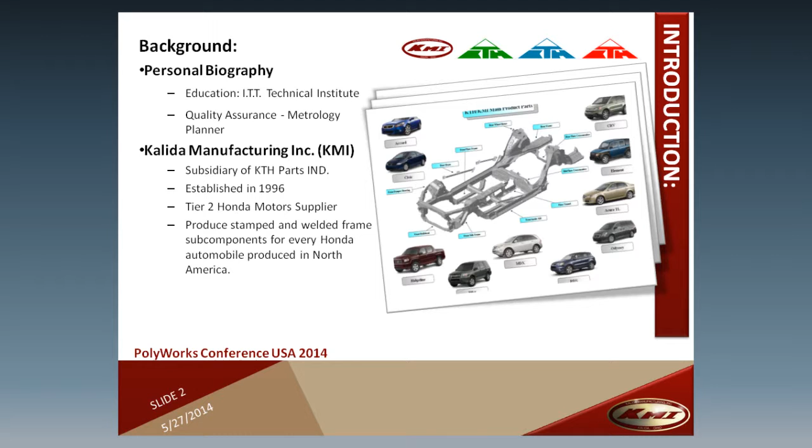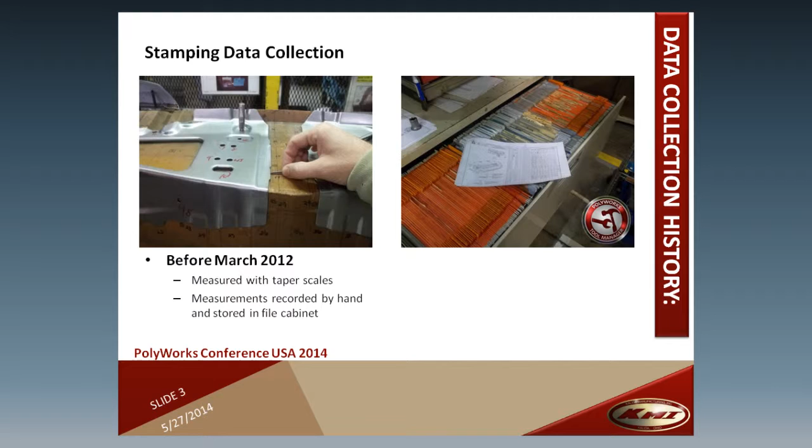So I'm going to explain first where we came from with our data collection process. 3 years ago, when I first was initiated into KMI, our process was to take data collection using tape scales, recording our data by hand and filing it in a file cabinet. Since then, we've been able to develop a system utilizing macros, portable CMMs, touch probes, and laser scanning to quicken this process and produce different tools that were capable of progressing what we do.

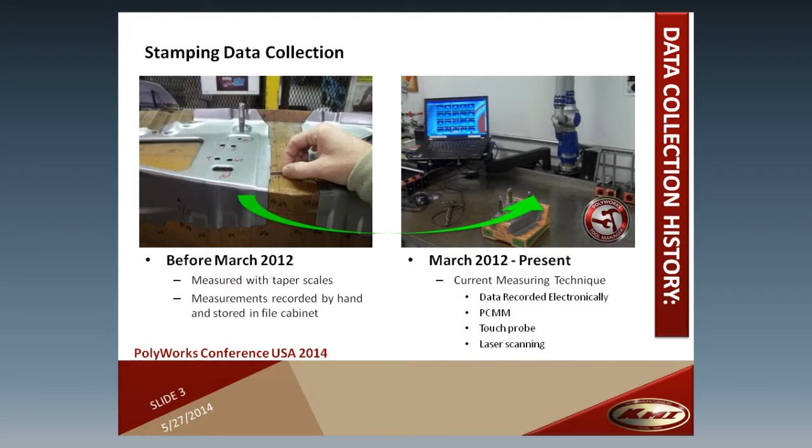So our team's goal was to develop a system of processes that are simple to use, increase data collection productivity, show time savings, and are compatible with both Faro and Romer arms. We try not to be biased, though those two will probably go hand in hand and have a war over that. Our system of application tools was to make sure that we had data evaluation tools, fixture layout tools, jig layout tools, program development tools, and data collection tools.

We needed to ensure that we had efficiency and quality. We used time and cost savings analysis and return on investment analysis to judge whether a macro was beneficial or not. I'm simply going to go through 3 macro sets from this point on. The first 2 are part of a larger project known as our KMI PolyWorks Tool Manager.

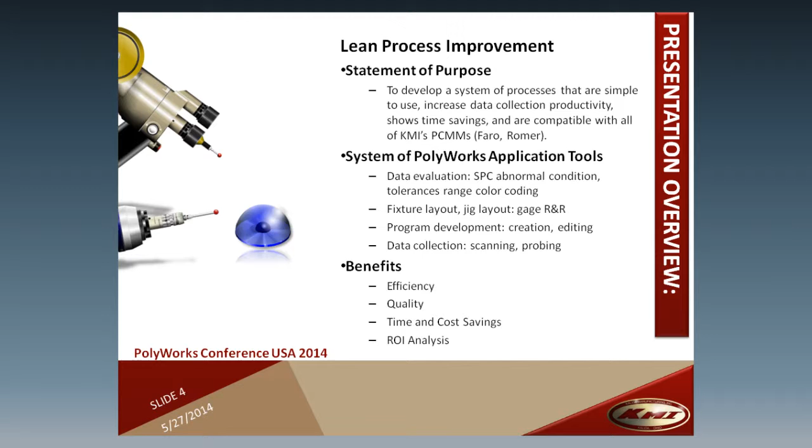So imagine if you're doing touch probe data collection. You always have a CAD in which you might have a surface point that is blocked by the CAD and you're not able to see it. PolyWorks has a tool that is called a guided image, but the problem with creating these images is it takes a while for the creation time. Sometimes locating this 3D scene is very cumbersome, and it's hard to separate and hide features and comparison points.

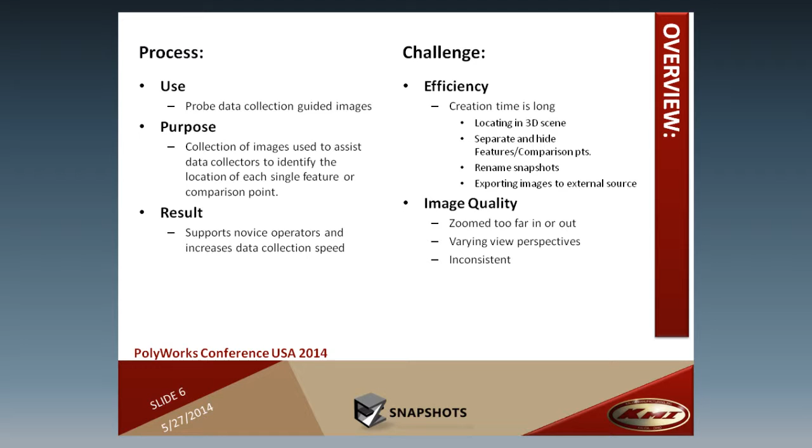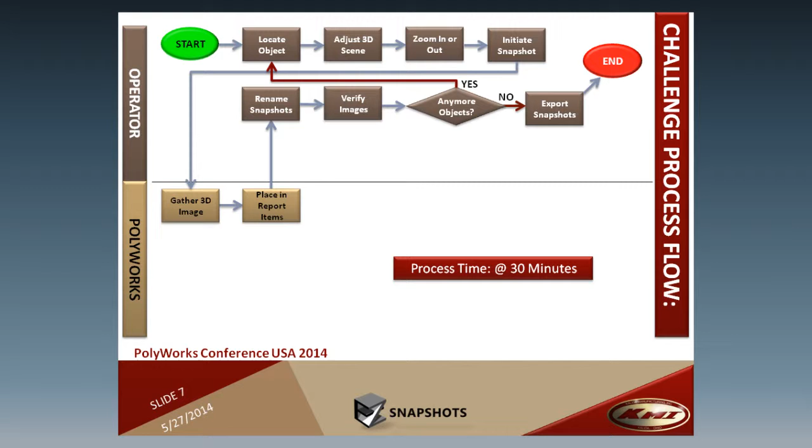We also have image quality. Zooms are too far in and out where the guided image is hard to see. The view perspective, it's hard to tell where the next point or the next feature is, and it's inconsistent. So here's the current process flow for what we have to do with PolyWorks. You see that it's really heavy on the user interface. The only thing PolyWorks simply does is generate the snapshot and place it in a report item. This process can take us about 30 minutes to do.

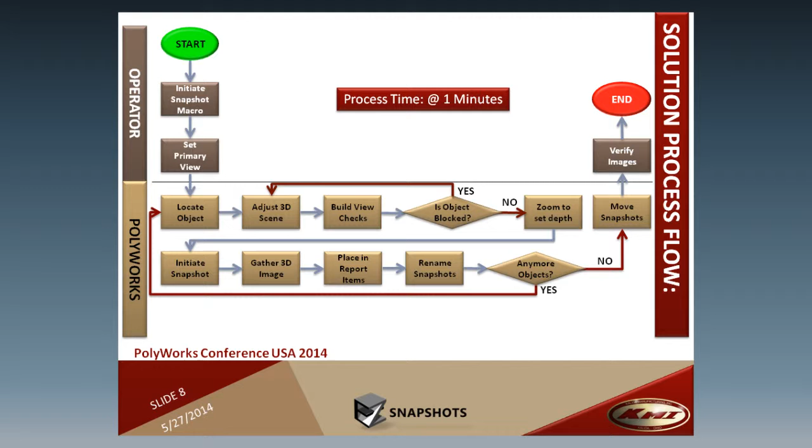What we proposed to do was to just simply have an operator initiate a macro, set a primary view, and a macro runs, and the operator just simply has to verify the image. We found that this process takes about 1 minute. We're going to go through a demonstration here, just simply how this goes, and go from there.

So when we initiate the macro, we have to establish a primary view. We set an access point in which we generate a 3D scene which is user-friendly, in which we pick a primary view. The operator uses a color coding in which they're able to rotate through the project, selects a primary view, and from there the macro begins.

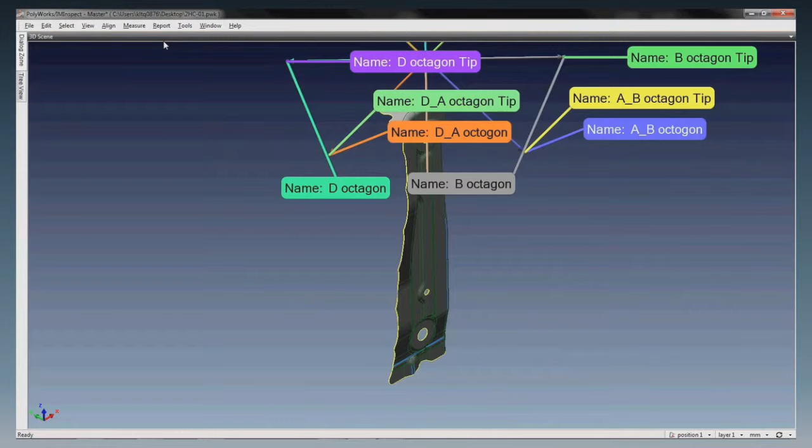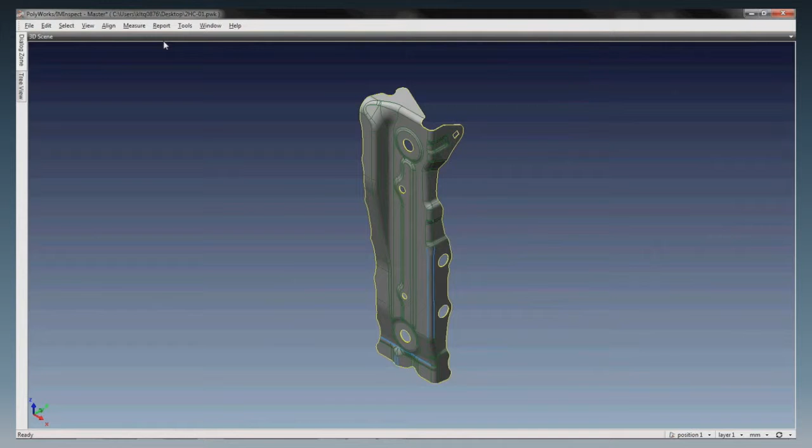We do what we call a vector bloom, in which vectors are centered out of a center point. If the vectors cross the CAD, it creates a point and rotates the CAD so that an image can be created. If we continue seeing this, it's kind of hard to verify that a point is created correctly or incorrectly. There's just too much going on in the current scene right now.

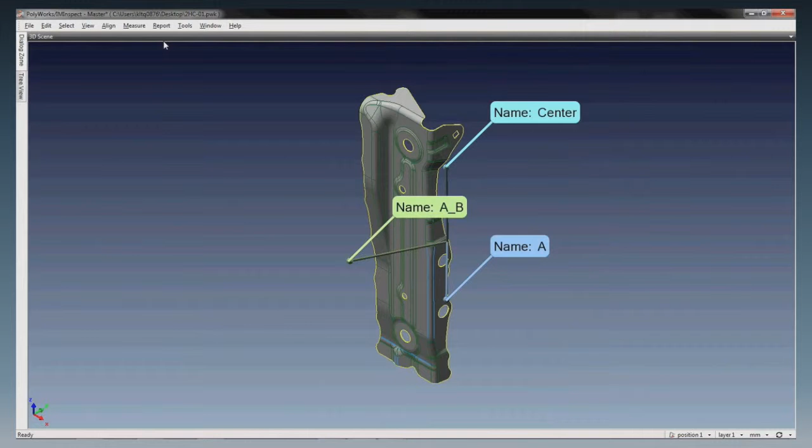It just simply continues through each one of the point features on the tree view, and it takes that picture of that point and stores it into the reports. We then take that report and file it into an outside data folder or source. So we'll continue with this. It's still hard to verify this point because of that.

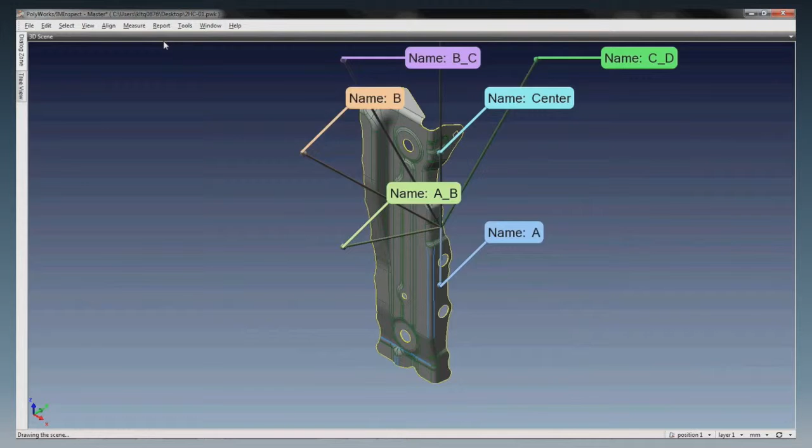Let it run here just a little bit. So it's kind of hard to verify, so we had to create a system in which we kind of hide the blooms, but we're still able to verify whether the image that we are creating is good or bad. It should be flipping over here sooner. And by hiding the blooms, we are able to actually speed up the macro.

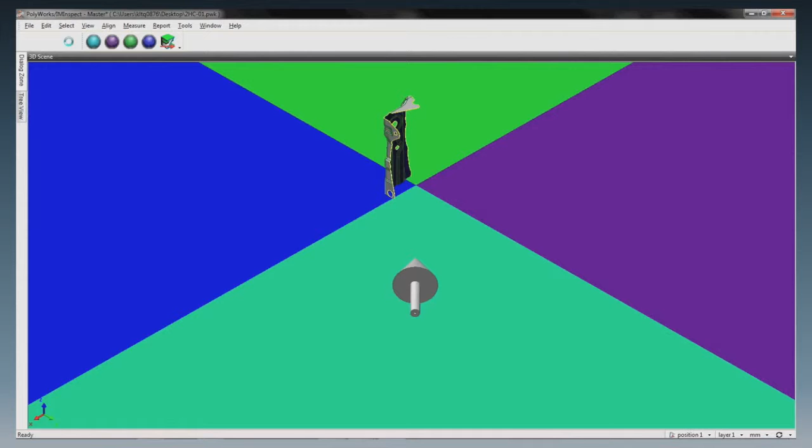So again, how do we make this faster? We're just simply going to hide the blooms, hide the creation of the 3D scene, the 3D modeler, so that we're able to view it easier. We don't see the actual generation of that. We don't see how it's changing. And this is actually going to speed up the process slightly.

So what's the benefits of this? We create efficiency. We save about 29 minutes for each program that we use this process for. We found that the break-even point for our time management was at 166 programs. We're currently at 702 programs that we have used this process for. We're capable of multitasking through this process. The images are consistent in their perspective. The location is stored on a folder or same location, and we're seeing continual benefits of 207 hours saved per year for this process.

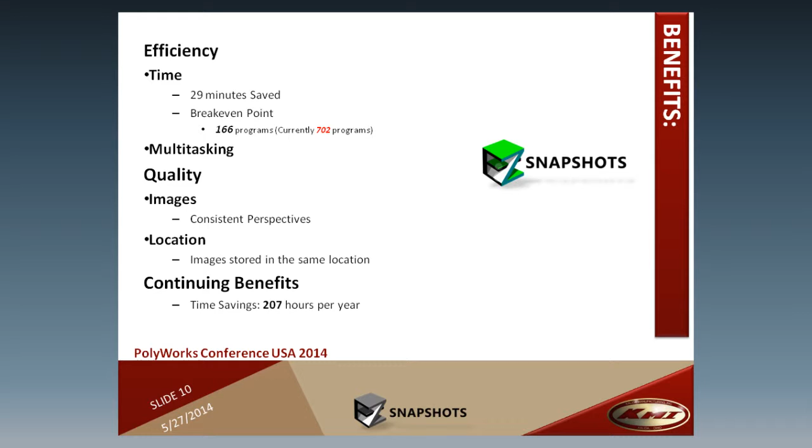So the next macro that we're going to go through is, what if I rework this and give it to another associate to build a macro with? This is actually one of my pride and joys. This is called the easy reporting macro for scan process. I actually reworked my picture macro and gave it to my fellow coworker, Brian Meyerholtz, to create a way to report scan data. Brian initiated this project back in November of 2013. His development time is 40 hours, and the size of the macro is 7 macros at about 3,000 lines.

The purpose of this is to create a scan report. We do about 5 scans each day. I'll give you a scenario in this instance. Say you have a die quality issue or something along those lines where there's a meeting within the next 30 minutes. It's essential to get that part scanned, get that information to a manager or someone in that meeting as quickly as possible and convey that information to them. So our goal was to actually cut down our report creation time so that we were able to convey any messages that we needed to that supplier.

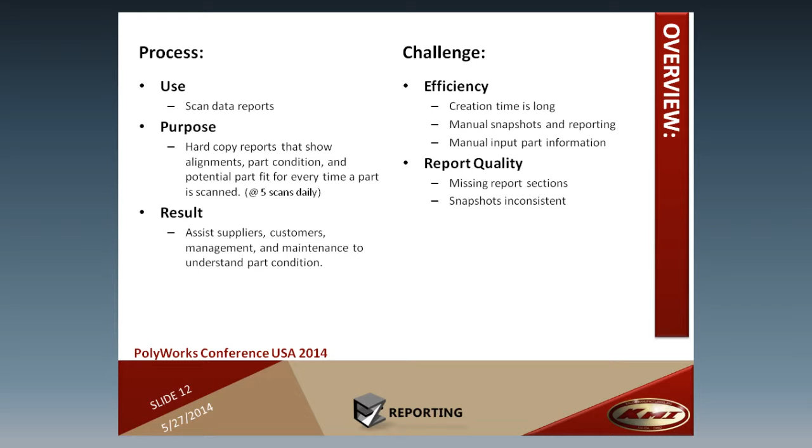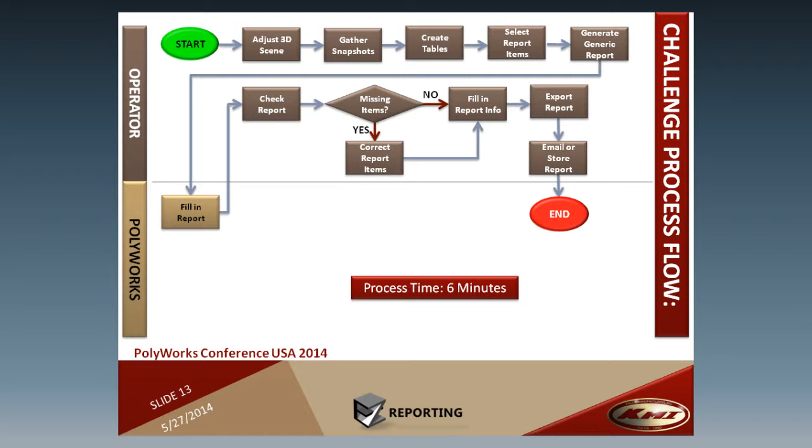The problem with auto creation or hand creation that we currently have in PolyWorks is the creation time is long. Manual snapshots and reporting add to this time, and manual input of part information. Sometimes we have missing report sections, and snapshots are inconsistent. So again, we're going to look at the workflow for this. Initially, we have a heavy user interface where about the only thing that we are capable of doing with PolyWorks was filling in the report, and we would have to make decisions from there. We are finding that this process takes about 6 minutes, and we thought we could improve it.

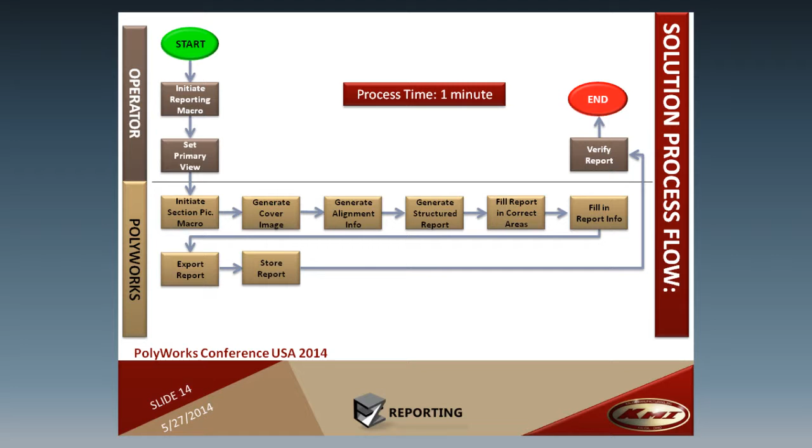With the solution Brian was able to initiate, again, we were just simply initiating a macro, setting a primary view, and verifying what the report looked like. This process we found took about 1 minute. Before we go into this demonstration, I want to give you a little background. I have 2 new associates with me. I decided to push them against one another. Gene started actually putting in the manual process for this, and we gave him a 30-second head start, and Brian started the macro script at that point to see where we go from there.

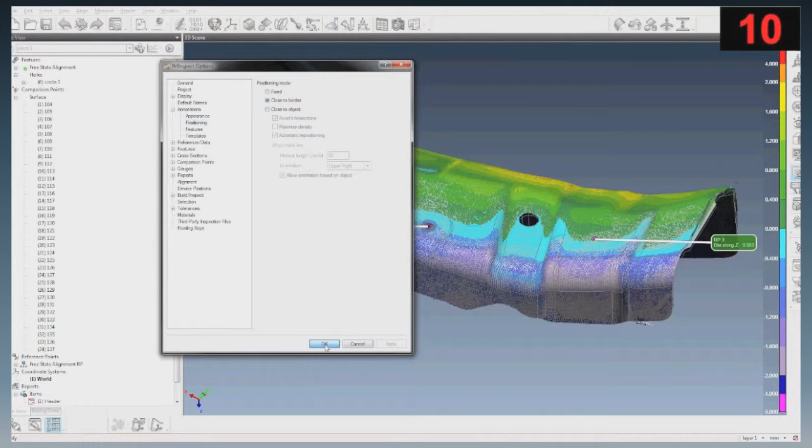So at this point, Gene's simply just going through the script and doing everything that he has to do. He just simply had a raw data sheet; snapshots, reports, and that stuff have not been generated up to that point. He's up to 10 clicks at this point in time. I told them to count up to 100 clicks while they were going through this process. Shortly here, Brian's going to start up his macro script, and within 3 clicks, he's caught up to Gene, who had a 30-second start. He's setting his primary view right now.

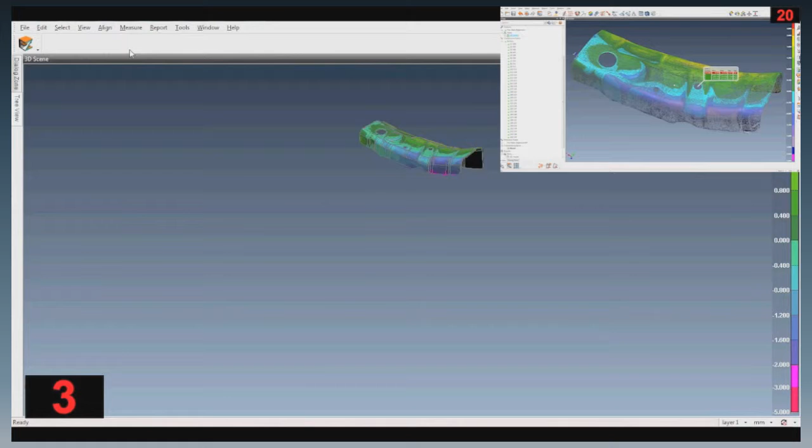And Gene's taking his first snapshot, and Brian just passed him, where Gene had 20 clicks and Brian had 3 clicks. Shortly here, it is flowing through the process. It's cutting up the program, and it's able to generate pictures from that.

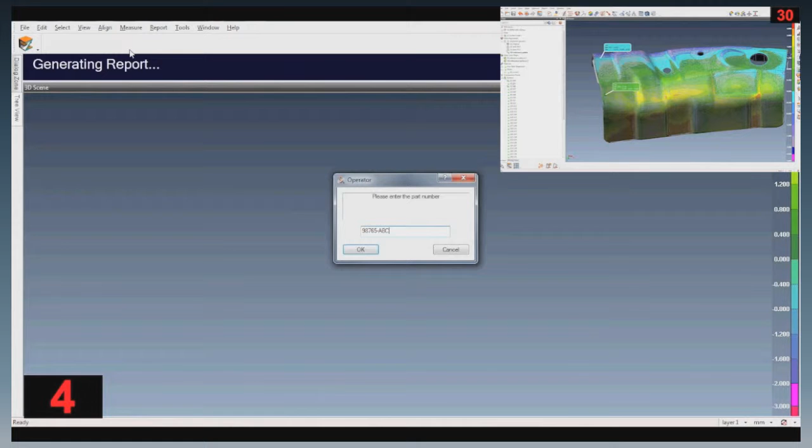It's taking that easy snapshots and cutting up the part. Right now, Brian is entering part information. This is just essentially what the part number is, whether or not he wanted to add special notes or anything along those lines. As soon as he's able to progress from here, our PolyWorks macro is going to auto-generate a report template which we can print off, hand to a manager, and go from that.

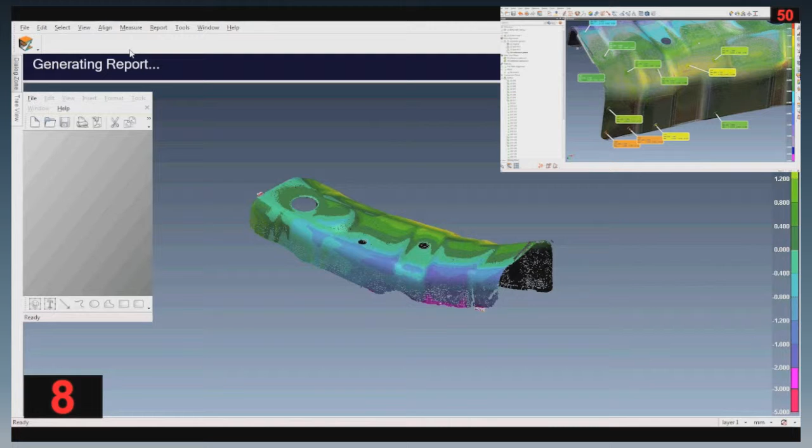We're at 8 clicks right now for Brian. It's going to generate 2 more images, and he's going to be able to verify his report. While Gene is just up to 50 clicks, and he's just taking a second snapshot on his surface points. Brian's verifying the part.

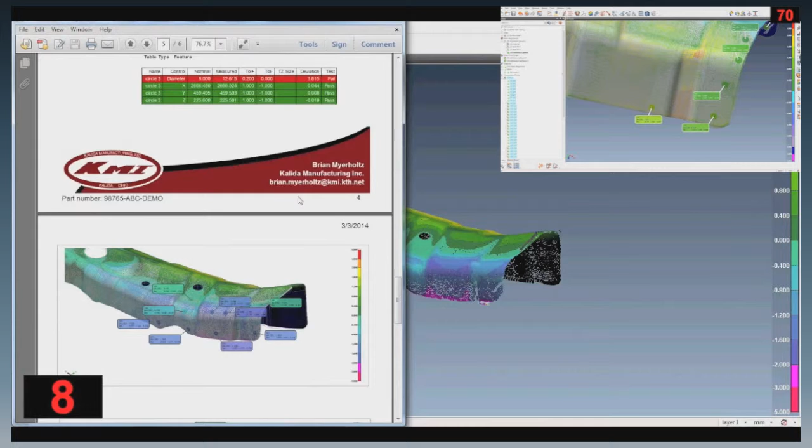We actually generated a template which is unique to KMI. We have the part information. We set the alignment showing where our alignment was. The part actually generates information that is pertinent to Brian, his email address, his name, without Brian ever entering that information into the report. Gene's still going strong here.

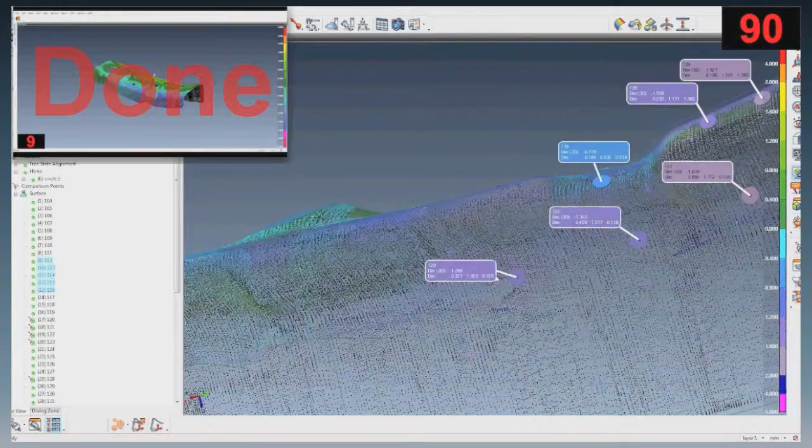He's at 90 clicks. Brian's just got finished at 9 clicks, and Gene's just halfway through his actual pictures for the snapshots for the surface points. We should be actually speeding this up shortly, but I'm actually going to stop this.

Gene's going to go through the same process. The movie will actually go on for another 2 minutes, 3 minutes, and Gene will actually make a few mistakes in that process. Where Brian's information was automatically generated, Gene would have to actually enter that information by hand and go forth from that.

The benefits to this is the efficiency. We're saving about 5 minutes per each program. So we're seeing a break-even point of about 480 new SCAN programs, or 96 working days for KMI.

This leads to multitasking. Actually, when Brian was running this test, he was signing off on papers that were pertinent to our quality process. The reports ensure that important information is existent within the process. The reports are consistent, and we have an exclusive style to our reporting.

The continuing benefits, this is the big one. Brian actually was developing this when he was only 3 months in at KMI. No prior macro script education, no experience along those lines. So this is all part of a big process that we call the Polyworks Tool Manager.

The Polyworks Tool Manager has been developed by Adam Steck-Schulte, myself, Brian Meyerholtz, and Eugene Swagger. The initiation of this project was 3 years ago, March 2011, and it is over 1,000 macros and over 100,000 lines of code. We are currently developing this process, and we're actively using it.

The part which I'm going to demonstrate in this process is our actual touch probe data collection process. So we went over how we were using taper scales prior and filling it by hand. Well, we were finding issues with varying data. How hard did the user push in on the scales? How does the operator read the scales?

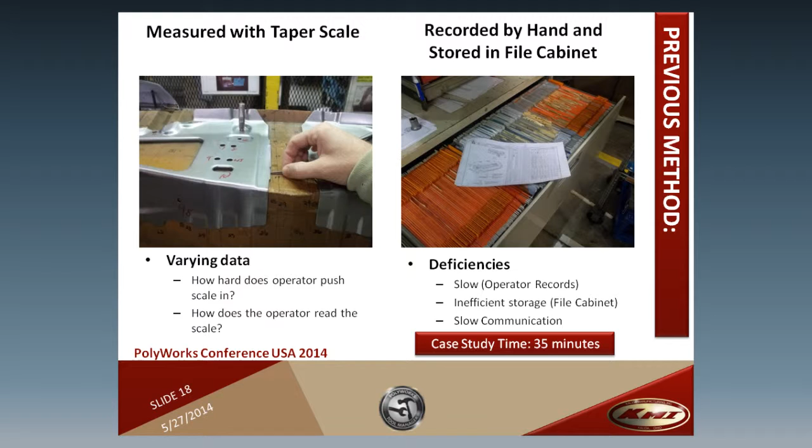Deficiency on data communication, slow operator records, inefficient storage style, and slow communication. We did a recent case study in which this took about 35 minutes to complete. What we decided to develop was the KMI Polyworks Tool Manager utilizing touch probes. We have 3 stations set up with cloned programs.

In this process, we have linked data trend charts, and you'll see through the video here, we're still using V11. The importance of that is that the data is linked within the trend charts. We created a program directory for users to be easily able to identify programs, click them and open them without going file open into different programs.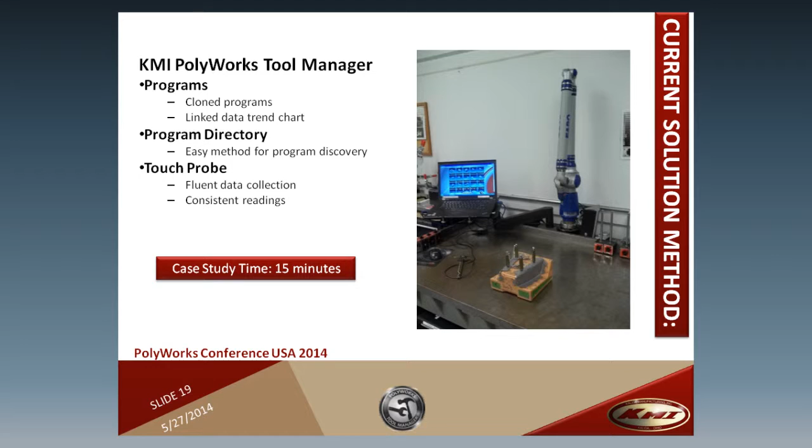We utilize a touch probe. This allows for fluent data collection and consistent data collection. In our recent case study, this took about 15 minutes. So I'm going to give a demonstration here on our current data collection process. Gene is actually our operator.

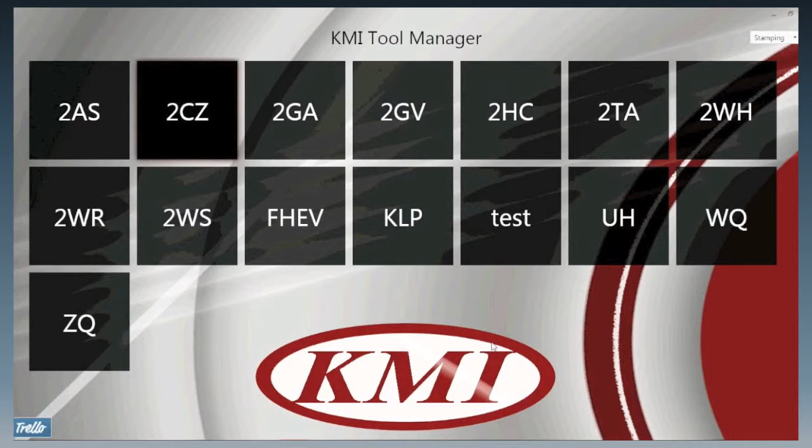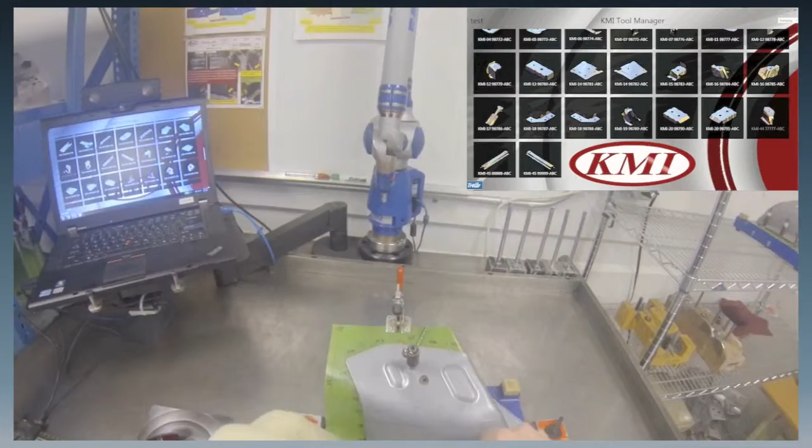He's going into our data hub or data directory, picking a model code, flowing through and picking a part number to open up here. He opens up a part number. He's able to get the part ready. He's able to multitask while the program's open. Again, we're utilizing V11 just because of the trend chart data collection and the ability to link the data between the two stations utilizing the stamping probing data collection right now.

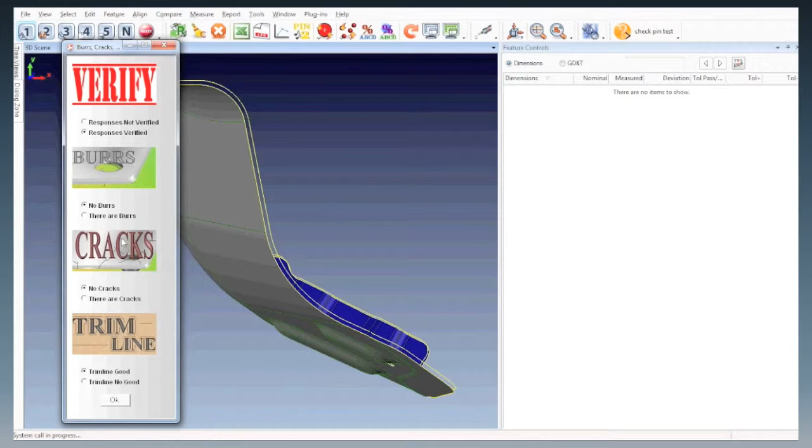As the program opens up, Gene gets a prompt telling what the part name is, the part number, and what die it comes from. Gene initiates step one. Please make sure to verify your responses. And he makes a mistake, and the program corrects it, and he's able to go through and go from that. He's entering his clock number, the press which the part came from, the thickness of the part utilizing calipers that are connected to the computer.

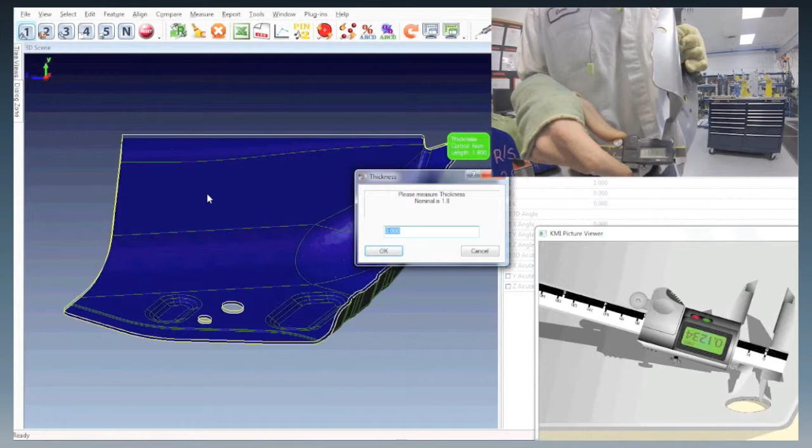He's going to get a reading here telling him if it's good or bad. He's going through with that calipers and actually measuring the holes, and he's able to hit the electronic connection, and it's able to record that information directly into Polyworks.

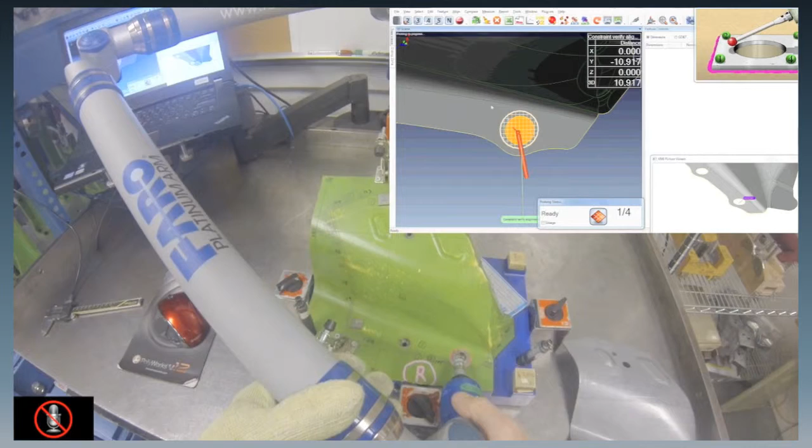The voice prompting system actually initiates him, telling him that he's on to step 2 of the process. Right now he's measuring an alignment verifier. This verification is stating that when he aligns the part, it is a good alignment. We were experiencing that sometimes when we would set up an alignment, that alignment was bad. That alignment verifier simply tells us that we have a correct alignment and we're able to progress from there. He's just going through a prompting system.

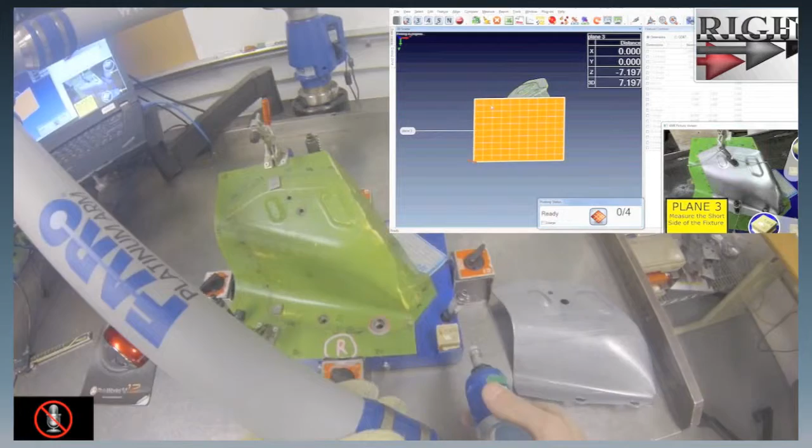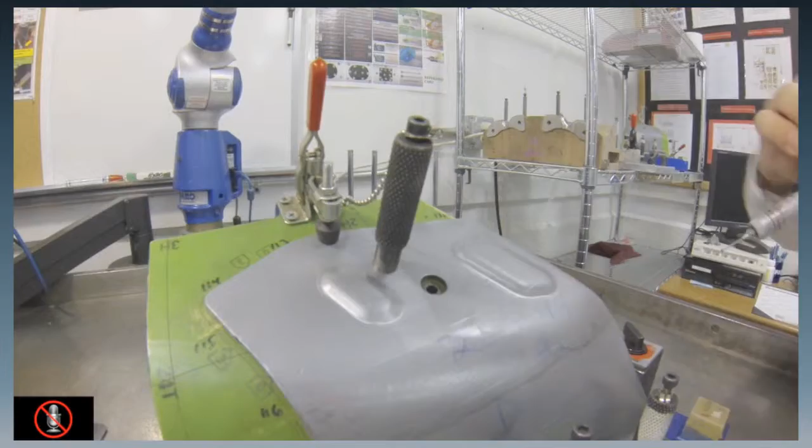On the right hand side there, you see where we initially used the easy snapshots. He actually has a guided image on the side. It tells him which side he's actually operating on, and he's able to go from there. He's simply going to go through now, measure the part in each location, and go from there. I'm going to continue with the presentation. What it'll simply do is just go through the process, having guided images. It'll have a prompt on how to do it, and we're also using the 3D scene.

The benefits of this: Polyworks records the measurements as they are taken. Data is stored electronically on a server. Data is accessible immediately. We utilize a touch probe, so the force we put on the part is consistent, and the ease of use. We actually trained an associate this past Monday to use this, and they are up and running using this process right now.

So to do an overview, a conclusion: we went over efficiency for the guided images, the short training time frame, time and cost savings through electronically stored data, quickened processes, continuous improvement activities, and we kind of went over quality for consistent data collection and scan reports.

So where does KMI go from here? We have all these nice tools, so we should do continuous improvement, correct? So KMI is trying to add to the Polyworks tool manager for the data collection process. We have established a method in which we're able to take any type of part and collect any data that we need for that in less than 6 minutes. We're able to add additional points to that without adding any time. Data is linked through the programs. Some of the features that I learned about today and yesterday have been very essential for that.

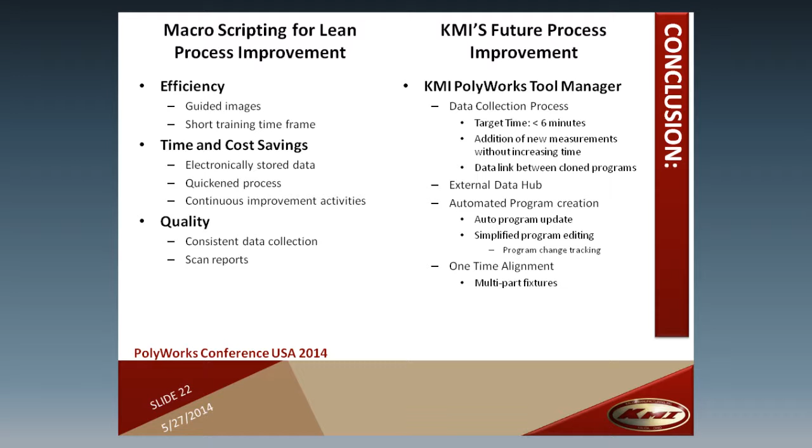If I may, for someone who hasn't tackled macros yet or is thinking about it, do you have 1 or 2 tips to getting started? That guy over there, David Pierre, I probably talked to him a lot. Doctor's offices. The first year that they had doctor's office, we gained a reputation by talking their ears off in there about macro development. They knew who we were after that because we were asking them questions in which they're actually putting in feature requests.

Well, I'm gonna take advantage of this opportunity. Has anybody worked out in financial terms what the payback is on the macros? You know, translating time right into dollars. We have, but I was told not to release that information. Is it significant? Yes, it's my paycheck a year.

Got a question over here. Do you have any plans to convert that from V11 to V12? We actually have a working representation of V12. I actually have to talk to David Pierre about that. What we were seeing is we weren't able to put that data collection in the trend chart. We weren't able to link it. But with some information today, a new perspective, we should be capable of actually progressing to V12, V14 from that.